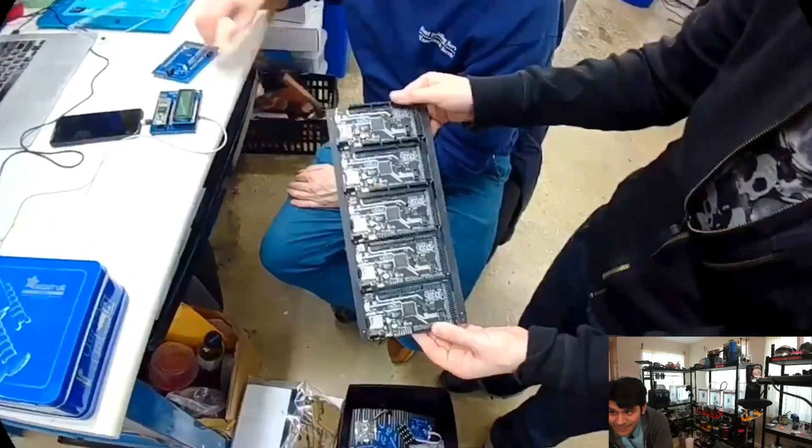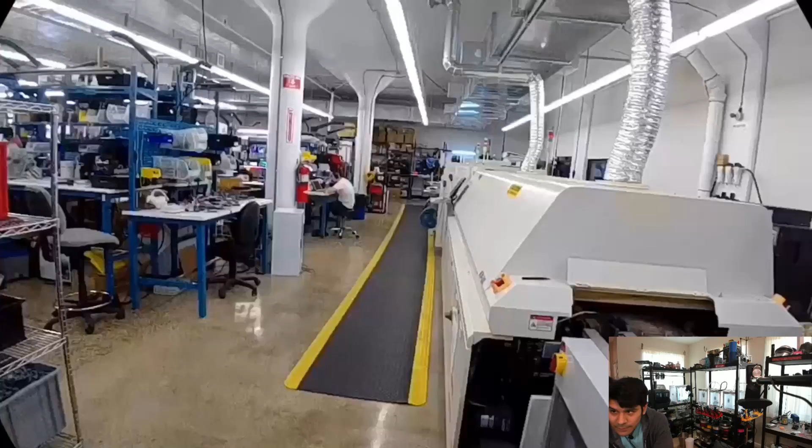Had a great time, we got to get a close look at the tester. This is Dano Wall, who works at Adafruit doing manufacturing, and this is Grand Central. So we got to see the first panel of the Grand Central. We're looking at some of the quirky issues that can come up whenever a new product is spun up. So taking a look at the Grand Central, took a close look at the assembly line.

Got a nice peek inside the assembly line. I had a nice chat with Dano and Andy, who run the assembly. Yeah, the main question you had is how do you convert, or how do you take the EagleCAD files and orient, lay them out? Yeah, so we were talking all about a lot of little details and things.

Got to, of course, see the puppets. Super fun time, we're already planning our next trip because again, we didn't get to stay too long. I got to miss out on meeting up with all the New Yorkers that we've grown to know and admire.

But I had a lot of fun on Ask an Engineer last week, and it's replaying. Very cool, wish we got more footage. I know, I forgot the 360, forgot to do a walk around. Yeah, when you're in the moment, it's a little bit difficult to capture it.

There's stuff going on, people around are like, oh just enjoy the moment. Now I did, and I didn't get to capture it with all my cameras.

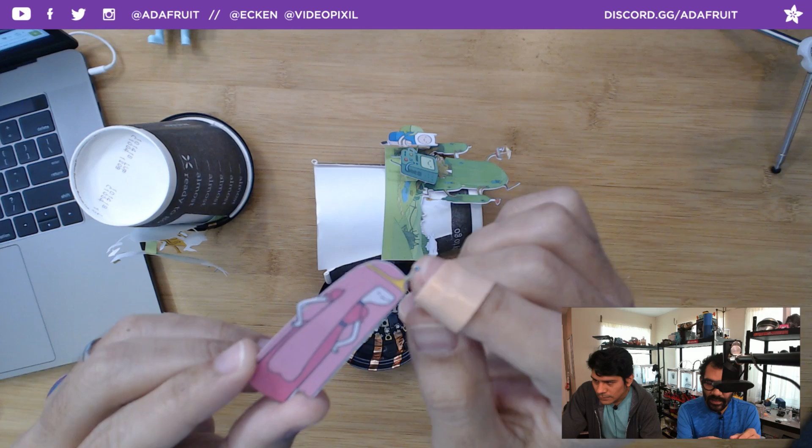Of course you could do this with just regular scissors, but to get these precise little tiny details, it's so impressive on the fine work. And the speed is super fast - you can cut this thing out in like 5 minutes, do a whole batch for your class, and get some really high quality cutouts.

Check out how crazy thin this little umbrella is that I was able to cut out. Pretty nice - this is all just paper. Did you layer it up? No, this is actually a little bit thicker, like cardstock paper.

You definitely want to use that. The smaller stuff, like just regular paper, might start to deform and bend over just because of how thin it is. Once you print ink on it, it starts to fold, get wrinkly, and lose its shape.

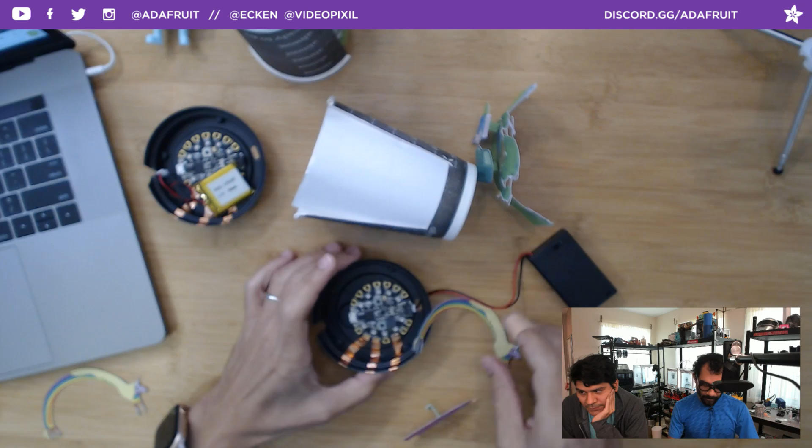Very cool though. All of these assets are available to download from their website, Cartoon Network, or you can use your own characters or use stickers and cut them out yourself - stickers out of this would be pretty cool as well.

Take a look on the inside - it's super simple construction. It's just the copper tape that's leading back onto the pads, and then in MakeCode we just have it change color when one of the pads is touched.

So we'll take a jump back into the Learn Guide as we cover all that. This is kind of geared towards educators, but if you are just a singleton wanting to work on it, you can do that as well.

The first thing on the code page, we walk you through setting up MakeCode for Circuit Playground Express. Really, really easy, just 3 steps - get into bootloader mode and drag and drop a UF2 file onto your CPlay boot drive. You can also have a link to the code, or write it yourself. Very simple, very easy to do.

As far as the circuit diagram, it's laughably easy. We have just some copper tape, so you can use any of the pads that use CapTouch, but we got these right here on the side. And that's it - the battery pack plugs directly into the JST port, and that's really it.

There's an on and off switch directly on the battery pack, so you just turn it on and off that way, or you can power it through the USB cable on your laptop.

When it comes to assembly, we show you how to cut out the window part inside of the cup - we provide templates for that. You can download the SVG and modify it based on your cup size. This is for a standard 12-ounce coffee cup.

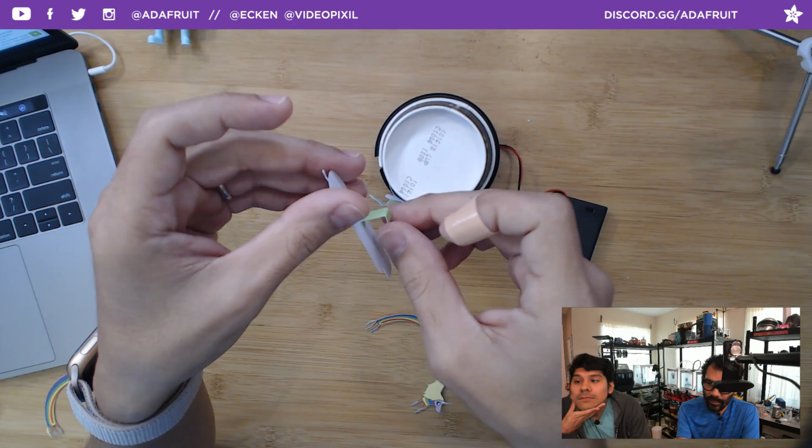Just a quick little tip on getting the little 3D pop-out effect, which we saw with some of the Christmas cards that we got. Super simple - you're just bending a small piece of cardboard and placing it in on there. It'll give you that nice little 3D effect, popping out on the scene.

Which is, I think, one of the coolest things you can do with something that's so simple - it's 2D, so why not make it pop out? Give it a little bit more life. It's pretty easy to do.

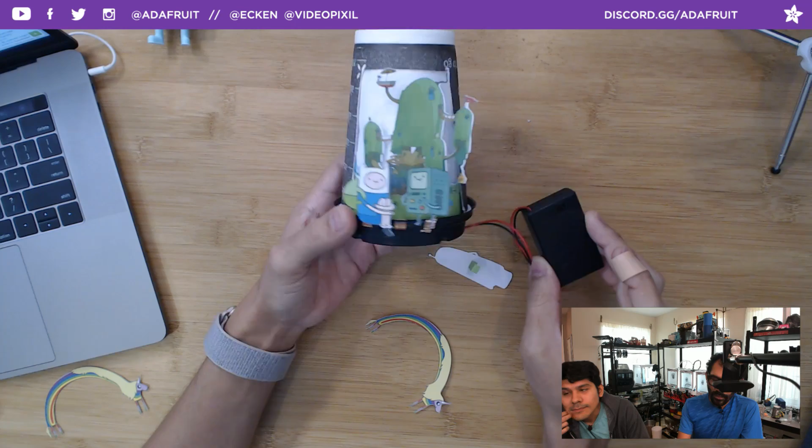All right, so we got that. Now constructing the lid, a little bit of copper tape here. There's already a sippy hole where you sip from, so you can route your JST cable through that little hole, and that way you can fit it on the outside there.

Using double stick tape to adhere the CPX to the lid, and then you can just cut away if you want to continue to use your USB cable to experiment with different animations and effects. Real easy to cut this material too. This should take about a half hour in your classroom to do. Super easy project with a lot of experimentation for the students in terms of the colors.

Of course, you have sound and all that as well. A little bit later, we'll actually show how to attach a little amplifier to it with not MakeCode, but with CircuitPython. You can get some really cool audio out of it. You have a nice amount of space to store on there.

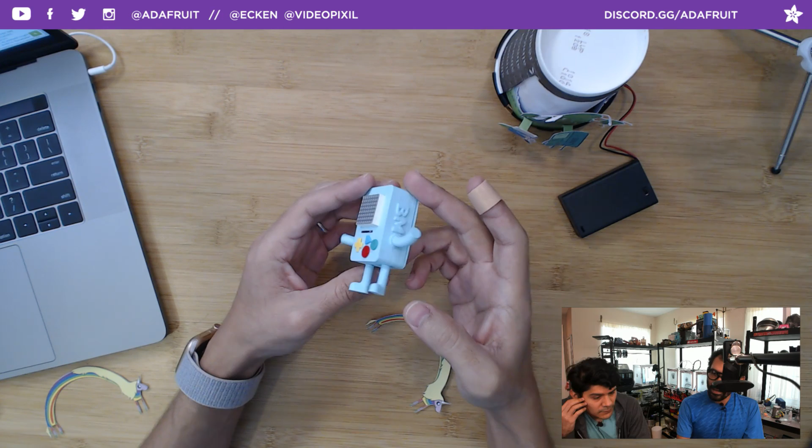Sweet. One of the first projects to kick off in partnership. There will be more, they have some ideas for 3D printing some projects. Definitely want to point to one of the first ones we actually did, I think like 2013, 12, 13. Yeah, one of, I think like the 5th project that we did was an actual 3D printed BMO using a little backpack on there.

I think the battery's dead, so I can't turn it on. But it's 8x8, super simple, cute little 8x8. Has the BMO face on there. That's an animated LED face, kind of like an emoji.

It uses the Gemma, the classic Gemma, old classic Gemma, yeah, with the mini USB ports. We do have a learning guide on this. I think it's been updated to CircuitPython? If not, it is on the list to be updated. So you can definitely check this out. All the files and the code to get this to work are still available on learn.adafruit.com.

Print yourself a super cute little BMO. It does a little dance, and wonders and sings about, yeah.

All right, well, very cool. Yay, Adventure Time, one of our favorite shows on Cartoon Network. So it's fun to do that one first.

But it's for kids, man. I was a kid watching that, though.

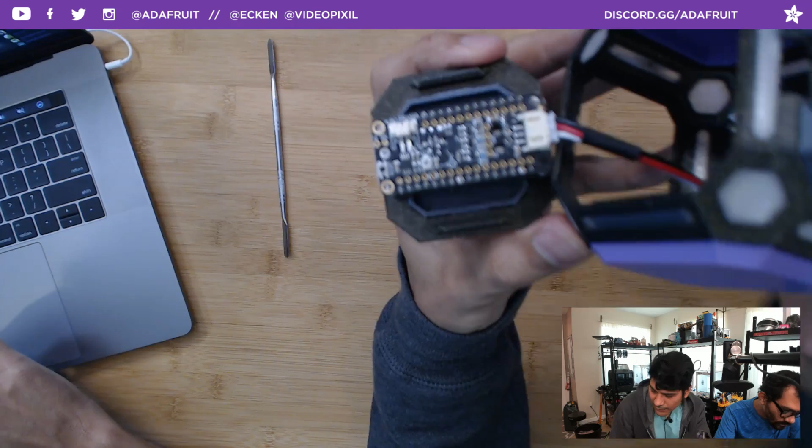It is in stock right now. We just finished a whole batch of them. And this is it on the website. It's about 10 bucks. You get all that stuff, the accelerometer, the NeoPixel support, RGB support, and an amplifier. So you get a lot of good stuff with that.

Although this isn't a real prop, it's more like a utilitarian type thing. It's got the accelerometer, so that's how you can detect what surface it's on. And then there's a NeoPixel, an 8 NeoPixel stick that's mounted to one of these panels. So you can really customize the panels and do whatever you want with them. But really, really clean, there's no free wiring. It's a JST connector for the NeoPixel, so it just literally plugs in.

I can quickly disconnect this, and now I have a detachable thing. This as well is just a FeatherWing, so that comes right off. There's the ESP8266 that's attached there with these nice screws.

So this is a really awesome modular project. Really like the prop maker wing, as it makes things so much easier. If we were to use breakouts, we would have like 5 breakouts, they would be full of wires, it would be packed. So with that prop maker wing, you get this really clean project now.

This just snaps in like that. Got all these snap fits everywhere, which is pretty cool. So that's the project, probably will be next week's project, which is pretty close.

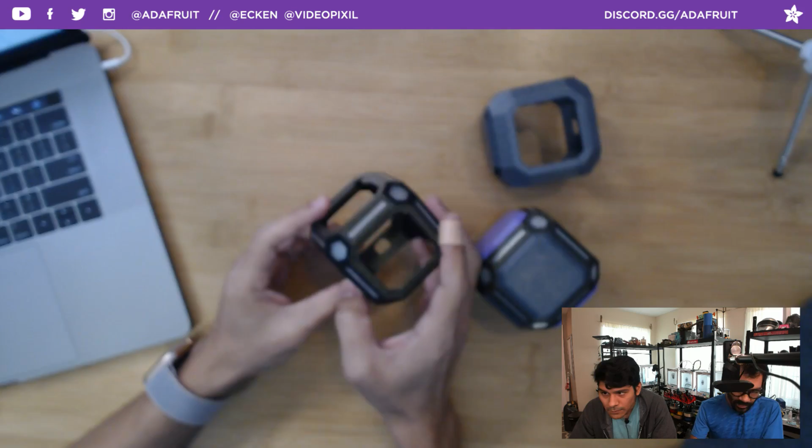Cool, I Love Doom is asking, what was the orientation frame of the dice? Yeah, well, how did it print, right? So the orientation is right here, and there's some special chamfered edges here so that the thing prints without any support material at all. You can see here that this opening doesn't have any overhang, and it just prints like that. I actually have to process the time lapse.

So I time lapsed it, and it prints without any support, surprisingly, just gotta orient it right. A lot of fun techniques to create this hexagonal corner. I did a tutorial on how to do like a triangle one, but this one was a little bit more trickier. This one required some lofting in Fusion to create this shape.

But we'll talk about that in the laters. Fun shape, fun project, IoT, Zapier, utilitarian time tracking cube. It was super easy to set up, lots of fun to get all the data flowing. Yeah, cool, it's working right now.

Did I mention there's a piezo on the top that gives you beeps and boops? I don't think you did. Yeah, there's a little piezo on top that gives you, so you not only get light, you get sound as well.

So let's move on to the next thing. This is a really fun prop. This is a phaser from the Star Trek series.

So let's go ahead and launch the website. Peter, tell me all about it. So this is a phaser type 2, body created by Shipbrook.

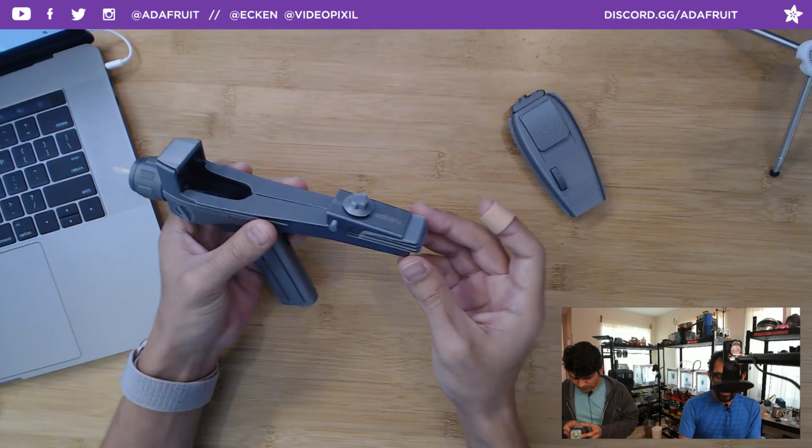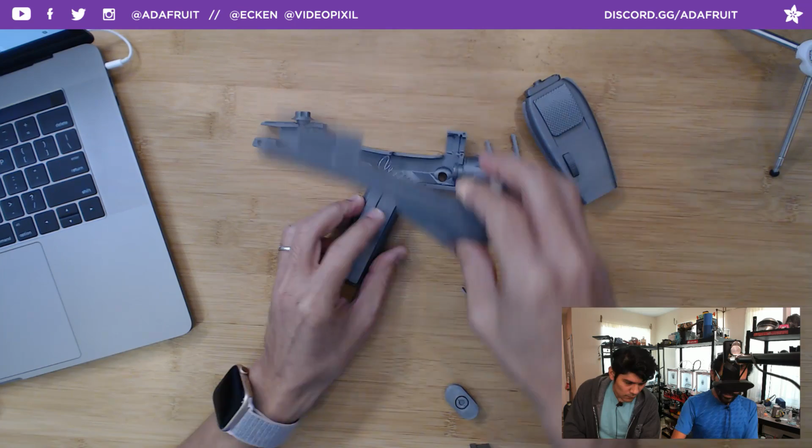If I go ahead and take this entire thing apart, you can see just the excellent job that went into creating a really good hollowed prop for this. If you take this out like that, you have ample room for a bunch of electronics in here. Super cool, excellent. You can see how all the little pieces fit together.

Huge props on designing something so intricate inside of, I believe, Blender is what he used to create all of this. Nice use of the little aligning nubs on there. If you go to close up here, you can see just how small we were able to get the detail for those little nubs to align all of the separate body parts.

The really good design in terms of the handle here. This actually - I'm not going to do it now here - but you can turn it, twist, it comes right off. And it's even hollow, so you can fit your batteries inside of there.

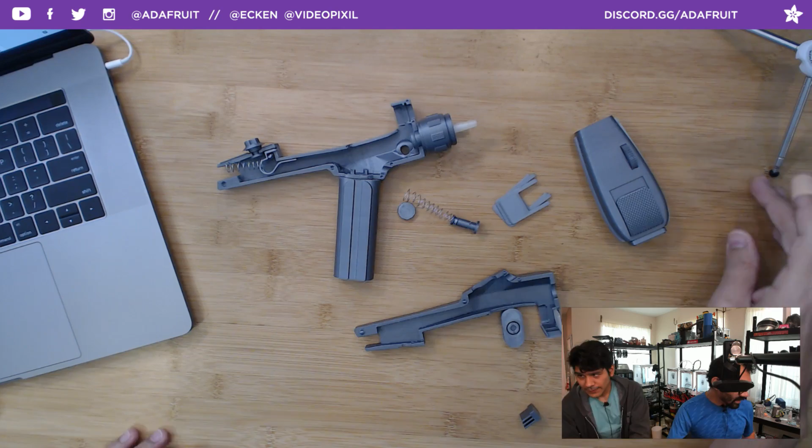So I think I want to have it as it is, and then just add all the electronics to that. All of these are also hollow as well, so you can add more batteries and more electronics, wires, all that stuff inside there. So super cool to see people sharing really great projects like this.

So definitely want to take a try, add a prop maker wing inside there and get some sound effects, or at least some lights going in it. Yeah, super cool little project I want to take up on. Yeah, good use of the spring to have the spring back on that trigger.

And let's take a quick look at the Thingiverse page. It's got some lovely photos. Looks like it's been post-processed with some color, maybe some sanding.

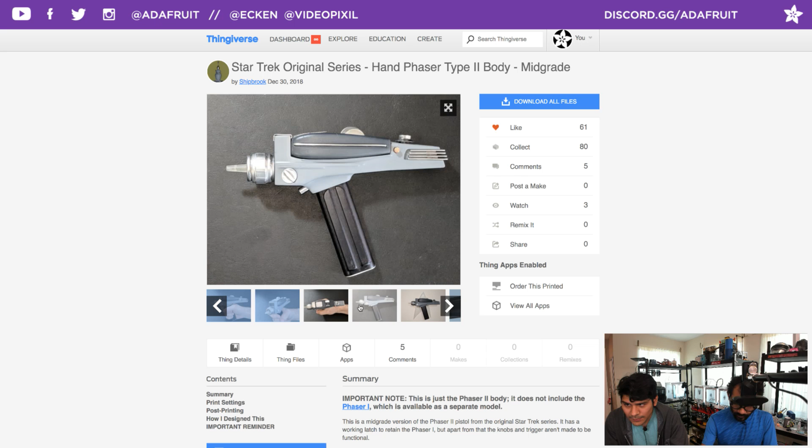Actually, on the description, he says that he didn't do any post-processing. All he did was print them in different colors. Got it. Okay. Yeah, they look great.

There's a lot of notes here, a ton of assembly instructions, post-processing notes here as well. Some more CAD stuff here, assembly of the knob and such. And definitely check out the other models and designs that he's worked on as well.

Phaser 1 - the top could be changed out. Yeah, there's a couple of different models for that. Very cool. So again, designed by Shipbrook, it's a free download on Thingiverse. We have the link in the description. Very sweet, and yeah, we'll be working on putting some electronics in there.

Excellent. Assemble this back together. Bam. All right, super cool, cool.

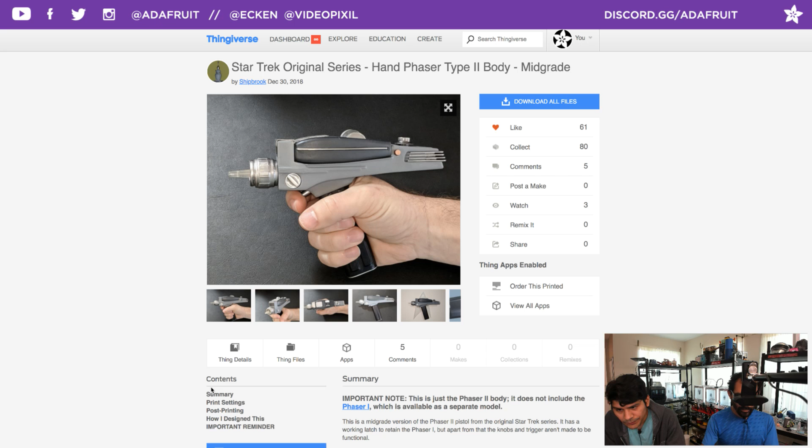I got some stuff to share. We're gonna kind of jump around a little bit. So real quick, this is, I guess, a part of the shop talk.

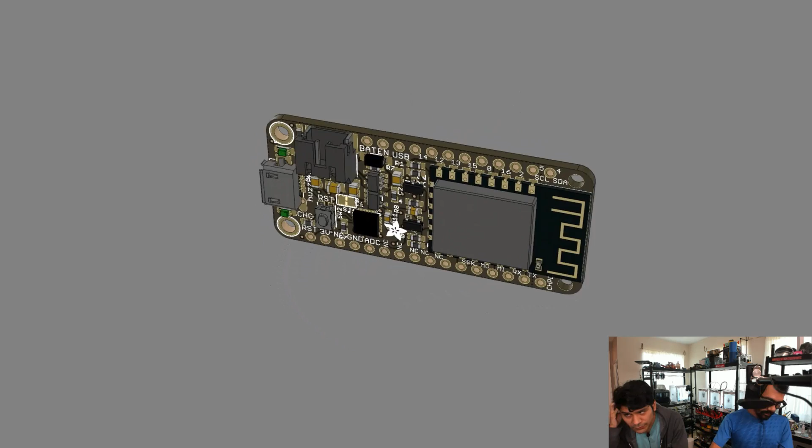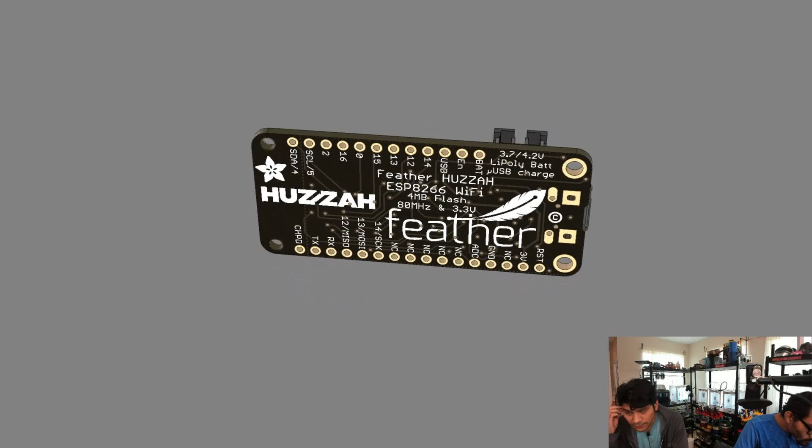I wanted to update the CAD model for the Feather Huzzah, this is the ESP8266 version. So wanted to update it with the new Fusion 360 export from EagleCAD, so that I can have a really nice model of the Huzzah. So this has all the components on it, all the pinouts, and some lovely silk screen.

It seemed to have worked out very well in the export. And I also got a super accurate footprint of the actual ESP8266 module. It even has the updated antenna design.

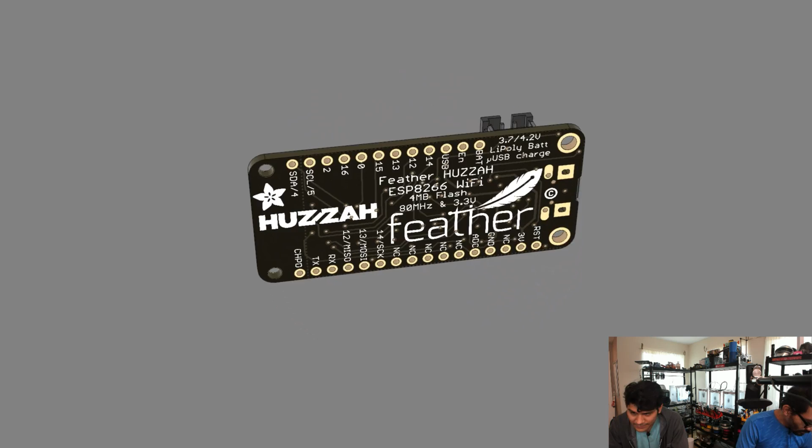This is a free CAD model that you can download from our GitHub page, our repo. This is Adafruit CAD Parts is the name of the repo, and that's the latest update - this awesome CAD model of the Feather Huzzah.

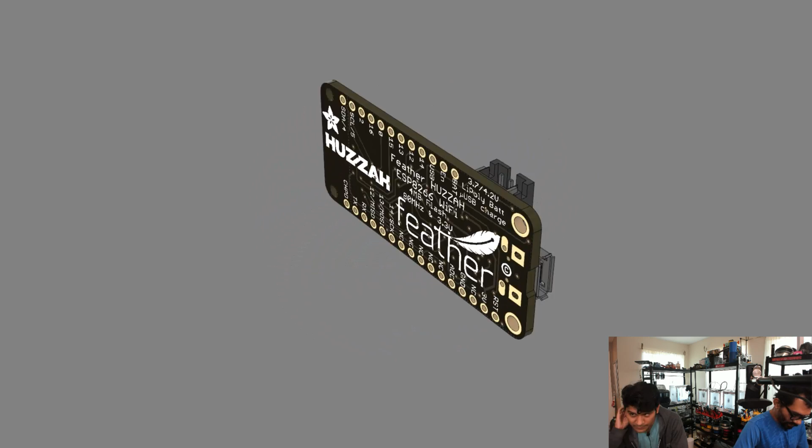We'll be, I guess, working on some more ESP8266 based projects, as it works very well with Adafruit IO. Also has built-in goodies like onboard LiPo charging, protection circuit for power, and native USB. So it works out really well. Great way to add Wi-Fi to your projects.

And it's in stock right now. Woo! Here it is, in stock. I'm gonna sneeze.

Woo! Thanks. All right, so yeah, it's in stock. It's a nice, low expense, low cost Feather with Wi-Fi. Sweet, and it's in stock.

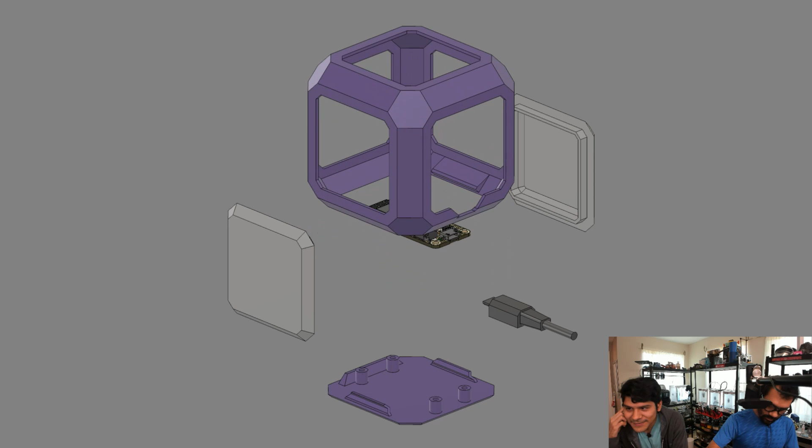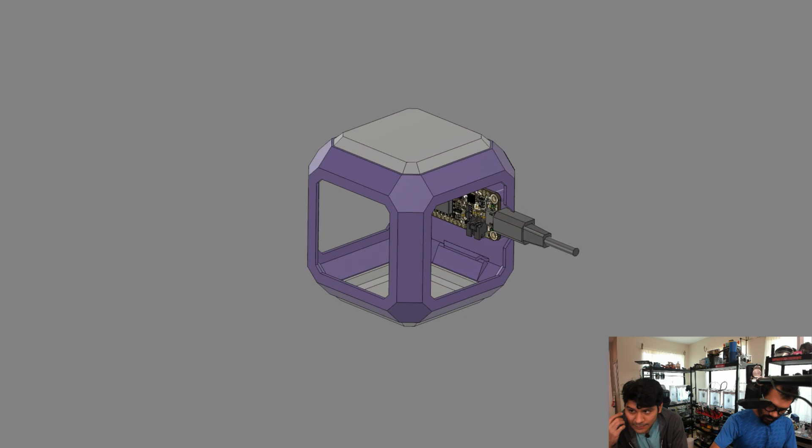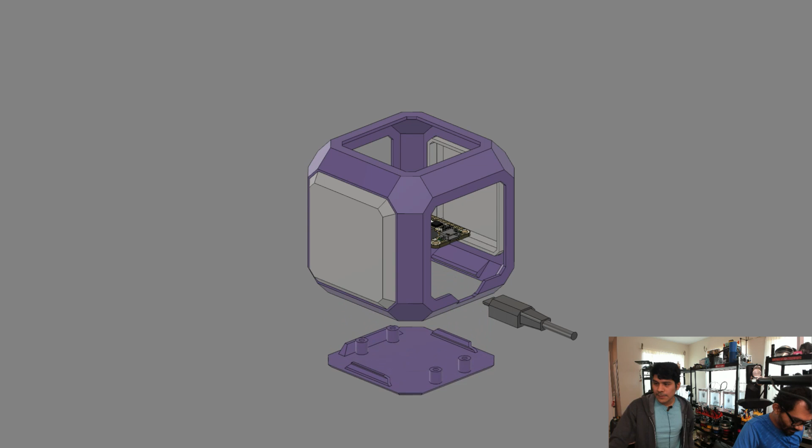Here's a little CAD animation of the thing we showed. I had some time to animate this just to show Brent, hey, this is how it works. This was before the dual extrusion stuff happened, but you can see how you can tilt it left and right. The reason why we limit it to just two sides is because we had it plugged in. We didn't want to have it battery powered because it will die eventually, so it's just something that sits on your desk. Animating our assemblies is both helpful for documentation and it just looks cool too, to explain how the thing is assembled. So there you go, that's all part of the shop talk.

Let me refer to the notes, see if I have any missing things. Yeah, I'll wait, he'll wait for the time lapse. Okay.

A lot of bear puns going on in the Discord. Bear puns? Okay, cool. Well, what were we talking about?

Just making sure that the shop talk segment has all the right stuff, that we didn't miss anything. Shop talk, I think that's it.

Yeah, we're gonna move on to this week's community makes. We have some fun ones here. So Star Trek was a bit of a community make, and we also have another one, a Lego-based one. Oh, let's actually do the time-lapse one first.

All right, we do time-lapse? Yeah, every week on Time-Lapse Tuesday we take a look at the awesome 3D prints going on from the community, make a time-lapse about it, and show the use cases this week.

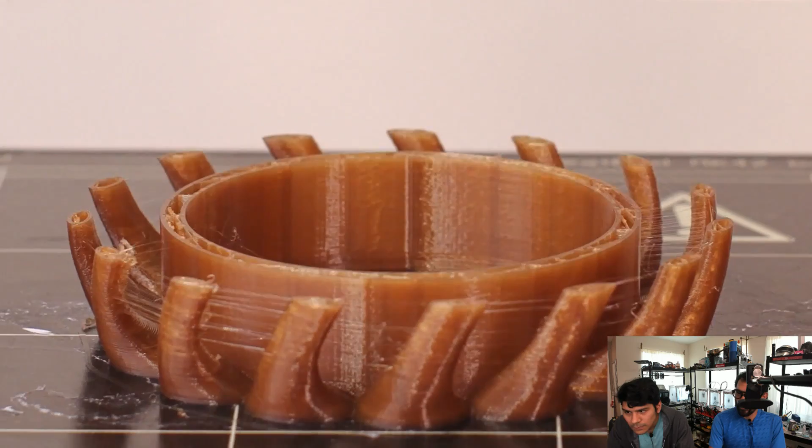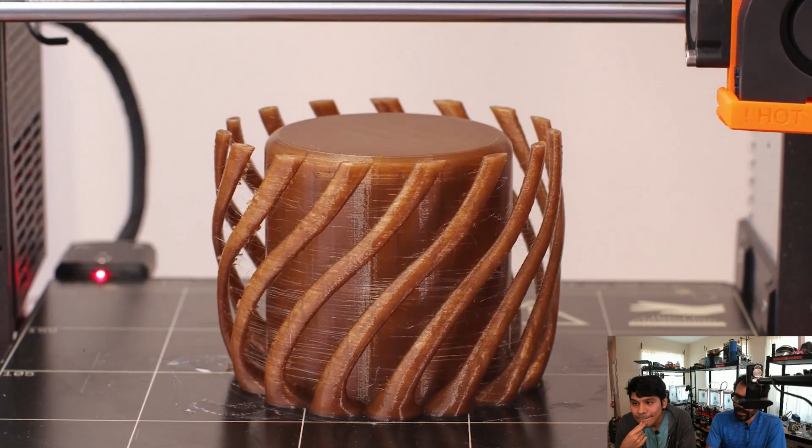It's playing. Spring-inspired project. I needed a new planter, and luckily this super awesome one came up. Looks like it's hovering when it's turned upside down. Yeah, it's a sweet idea to print it this way and then turn it upside down.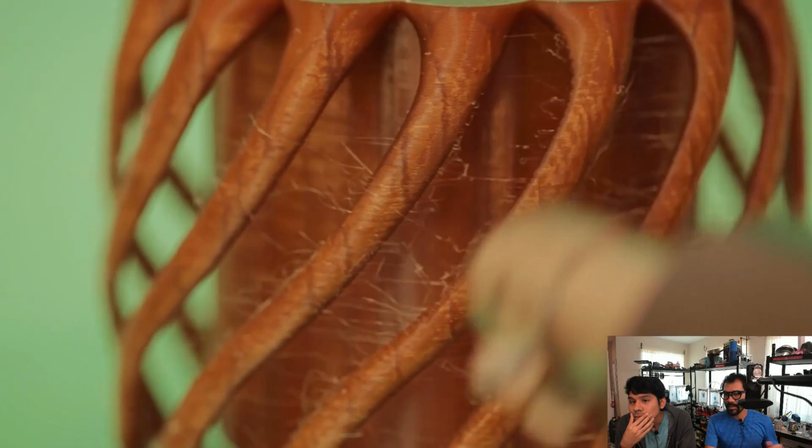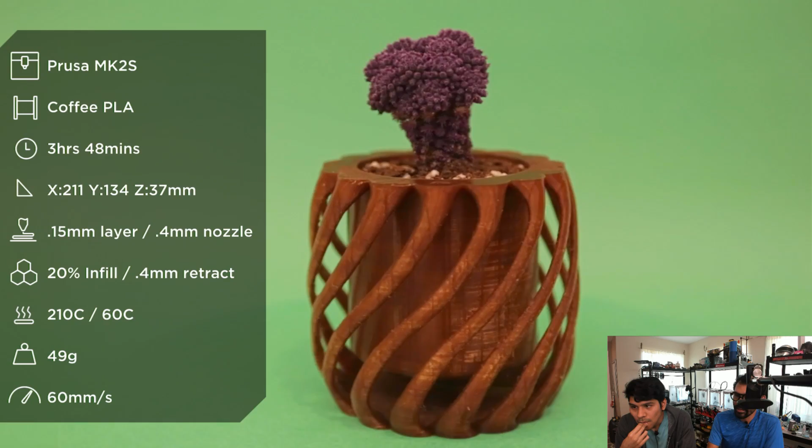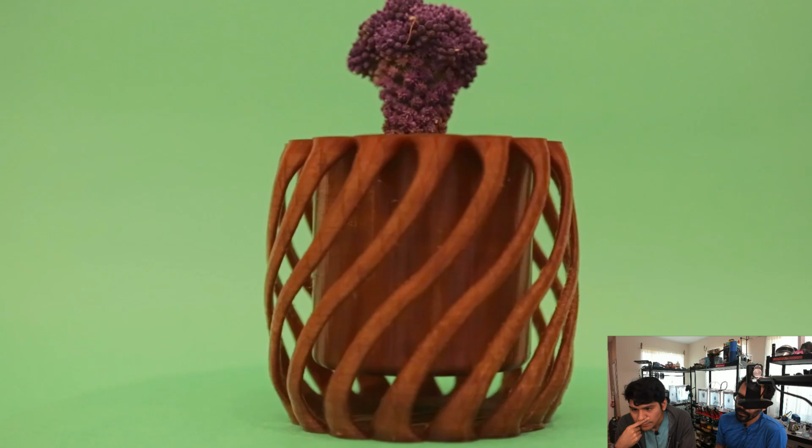I didn't have my settings for the Prusa optimized, so I had a lot of stringing. Luckily I saw a trick, I forget, was it Maker's Muse, who showed how to use a hot air station to get rid of all those. So I set the temperature to about 180 C and used one of the smaller tip air hose nozzles to get to that. This is using the Protopasta Coffee high temperature PLA, which does really good with annealing, which means you can heat it up and it'll get stronger. So I didn't notice it start to sag or get soft while I was doing the heating of the retraction blobs there.

So it was able to survive, and here's what it looks like. Super awesome. I don't want to turn it too much so the dirt doesn't get everywhere, but it looks like it's hovering. Probably, we don't have a good camera angle for that. Here we go, yeah, a nice little effect there. Yeah, so you get some distance between the bottom of the planter and the bottom of the base. Sweet design technique.

The coffee filament printed pretty good. You just got to get your retraction settings and temperature settings optimized so you don't get all that stringing on it. But it's a nice little test print to set up your settings for, and of course, as a planter. Did you have to scale it at all? No, this is 100%. It should fit on even a small printer, like the Inventors that we have in the shop. That's true, should work out very nice.

Also, I had added a little hole on the planter side for drainage. Excellent, super cool. Design is on Thingiverse by Lucky, who uploaded this, and it's a free download, so you can check it out.

So that's this week's Timelapse Tuesday. Super awesome, video is up on YouTube as well.

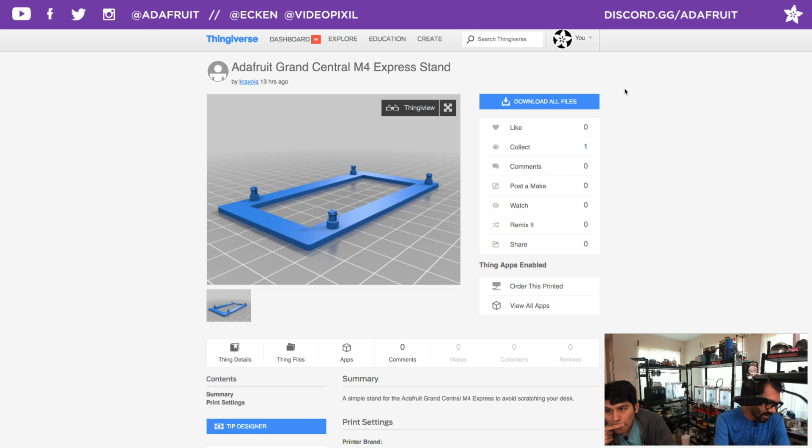Another cool thing that just came through on Discord that I just noticed was a super cool stand for the Grand Central. Oh yeah? Let's do that one. Let's see, where is it? This one? Yep, yeah, simple little stand, doing some programming right on it. You want to have it on your desk, you don't want it to make contact with any other metal, you can have it propped up. I thought this wasn't out yet, but I saw some people on Twitter saying they got theirs, so it should be arriving to everyone.

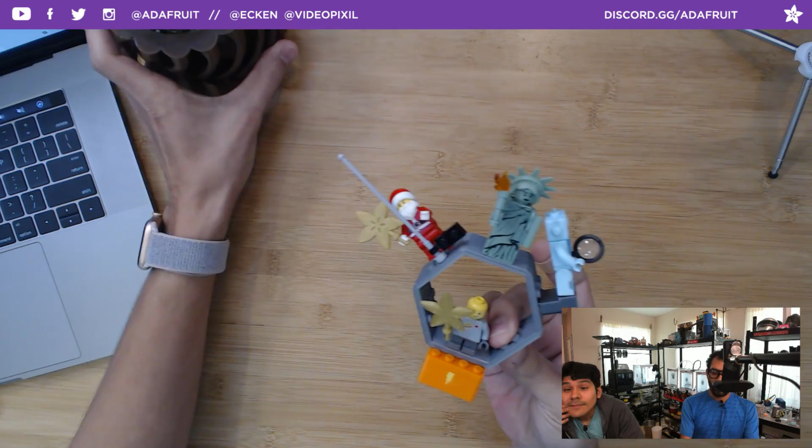We're not done yet. Where's that Lego piece? This one, there's a couple of different ones. Two of them. A stand, which is this nice hexagon shape. What's really cool, it has the tubes and the pegs, studs on the other side, connected to our little camera cover for your laptop computer.

So I have a little Adafruit here, and then the second one is this 90-degree brick. So if you have a plate that's on the wall, you can have this standing out.

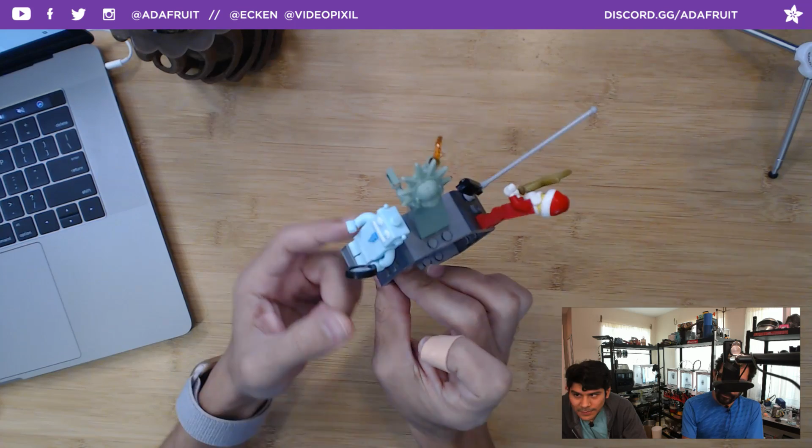And a little side note, that's a Statue of Liberty minifig that we got at the Lego store while visiting New York City. These were actually free, if you have Lego VIP, I had enough points to just get souvenirs for free. It comes with a magnet base as well, with a New York panel on it, a plate. From what I hear, you can't get it anywhere else other than New York. I don't know, maybe we'll see. Let us know if you guys are Lego fans, maybe you know. But that was very cool.

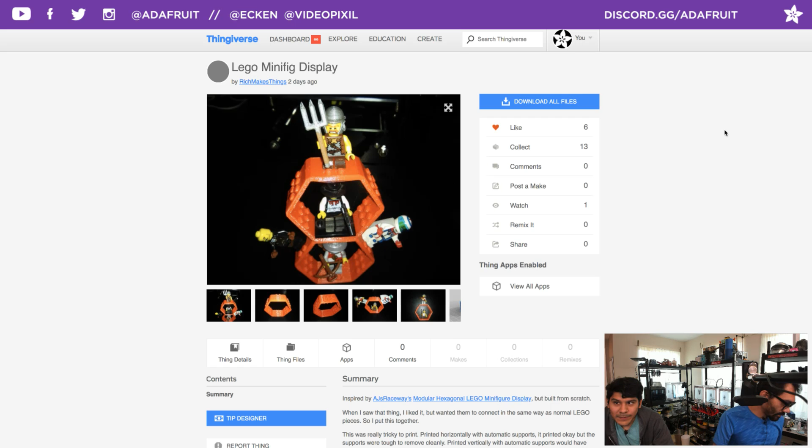Very nice little Lego add-on to one of our Lego projects. And the little logo they're holding is from 2 weeks ago's project, the Christmas tree, which has the Adafruit topper, compatible with all the Lego stuff. Here it is on Thingiverse by Rich Makes Things, who uploaded this to Thingiverse.

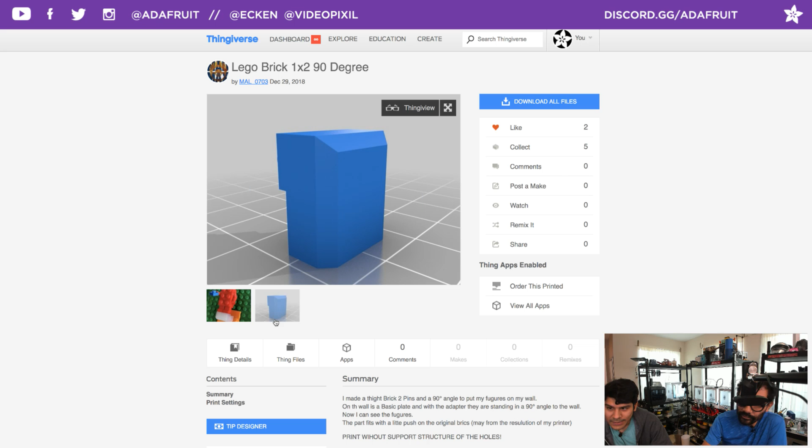So very cool, you printed it with supports I believe? I printed with supports. Excellent, and it turned out great. Print it in whatever orientation you like. And here's the other Lego bit, the brick, a 1x2 90-degree adapter. Super cool, very cool, Lego, Lego, Lego.

All right, let's keep on moving. This week's Community Makes, we have a wearable mini POV armband. This is a project from back in 2014 using the mini POV kit. It's a wearable kind of box that you can wrap around your shoulder if you want to run and get these cool effects.

The Ray Gun Blaster, this is a classic 2014 project inspired by the ray gun from the Fallout game series. It uses a trinket and the sound effects board to make a working prop that has lights and sounds, and it's been remixed here with some words and things.

Very cool. iPad Pro bumper is a Ninja Flex flexible material based project. That's for the new iPad Pro 11, the 2018 iPad. Been loving my iPad, and we had to make a case for it, so we made it out of Ninja Flex.

Another ESP8266 Huzzah based project. This uses the Adafruit Feather TFT FeatherWing 2.4 version, I believe, to create a weather station. This pulls the data from one of the weather APIs and displays the data nicely on your Adafruit Feather display, which is really cool. A lot of people have made this project, it's a very popular project.

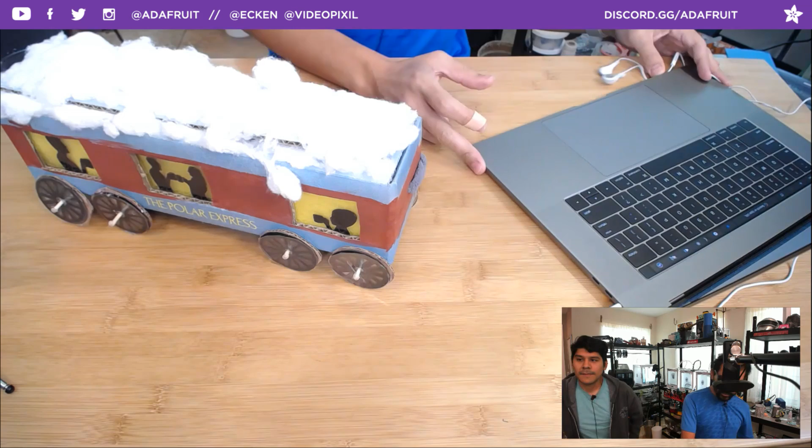Oh wait, we got one more. This is not a community make, this is a family make. I was supposed to talk about this during the Make Code section. Yeah, but it wasn't made with Make Code. This is just a remake of Mike Barela's Circuit Playground talking thing, I forget what it was, it was like a little talk board. All they did was just change out the sound effects.

So for a school project, my son had a little train project he had to make. Yeah, of course we went all out. Added some Circuit Playground Express, had a little amplifier in the back, used some bare conductive. Show the other side, there's a lot of... oh, there's a speaker inside there. We added a little microphone, I'll open it up in a minute. But this is a simple little Polar Express train. I think all the kids were supposed to make a train. Yes, they're all connected together, so he has a little string back here. Yeah, of course we went all out. I love to point out a couple things.

So these characters here are vinyl cut, using the Cricut, it's a smart vinyl cutter. That's me, that's a silhouette of me. So Brandy took a photo, actually Gavin took these photos. That's Pedro, and that's Brandy, his wife, and that's Gavin, my nephew, Pedro's son, right there drinking coffee. So it's absolutely personalized. This is just an Adafruit box, or maybe an Amazon box, that we cut out. And the wheels were cut using the scissors. Oh, just scissors? Okay, yeah.

And then hot glue to put everything together. A couple of cotton balls up on the top there to act as snow. This is one of our switches, a really nice switch, nice big beefy switch. Velcro straps for the top. And here's the inside, let's do an overhead review, take a look inside. We have a Circuit Playground on the side here, and all the connections, look at that.

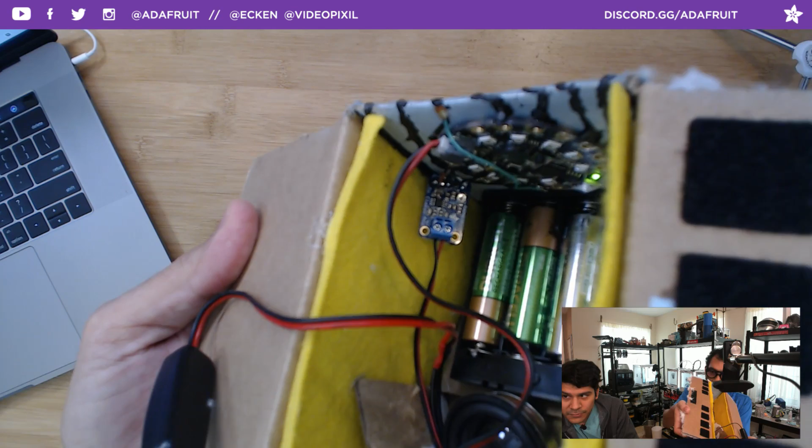It's a 3 AA battery pack that connects right into the JST port, and the speaker plugs into an external amp, this is the PAM8302. We love this chip, we love this amplifier, we use it in all the future boards. But if you want to add more oomph, more audio to your Circuit Playground Express, you can connect this external amplifier to pin A0 or A1, one of those. We have a wiring diagram in the Big Mac Soundbox project that we did with CircuitPython and Circuit Playground.

But yeah, this is a CircuitPython project, yep, it's just a remix of Mike Barela's project. Gavin was loving this thing, yeah, it was the only one in his class that... it's so loud. It is, but this really little speaker is super loud, 40 millimeter, nice and small speaker. It's basically a mini subwoofer, it's a trumpet speaker definitely, it's got a lot of sound, has some bass in there.

Some nice techniques to keep everything in place, some little cardboard edges here to act as like a wall, and a nice little tip here.

Because of the way the layout was, we had to take note of where the wires were so they wouldn't get in the way with the sizing of the box. So that meant that one of the triggers would either have to go underneath. We didn't want to do that because we're actually adhering this to the box with some double stick tape.

Smart. We're just using a jumper wire to go from one pad all the way out here so you can get that last pad in there. Very clever. That's the way to do that. And we're just using the copper tape soldered to some silicone coated wire, and it's just meeting back up to the ink here.